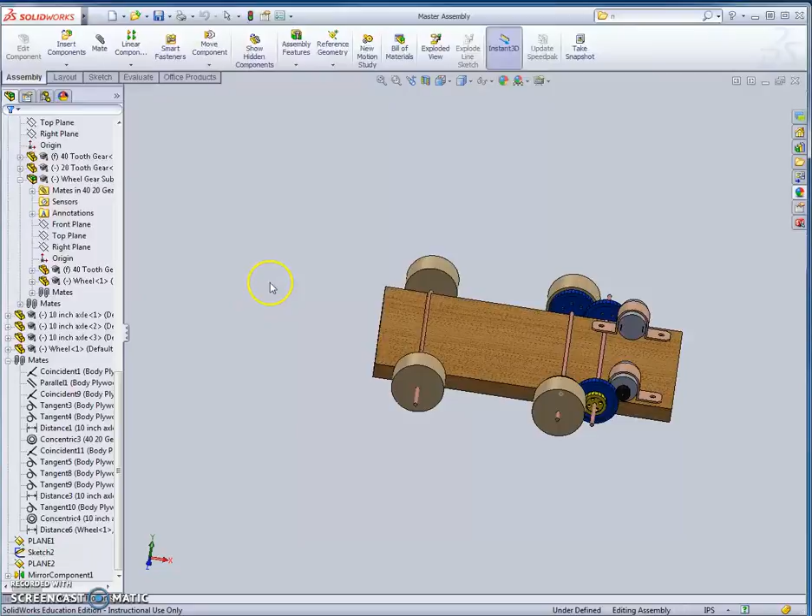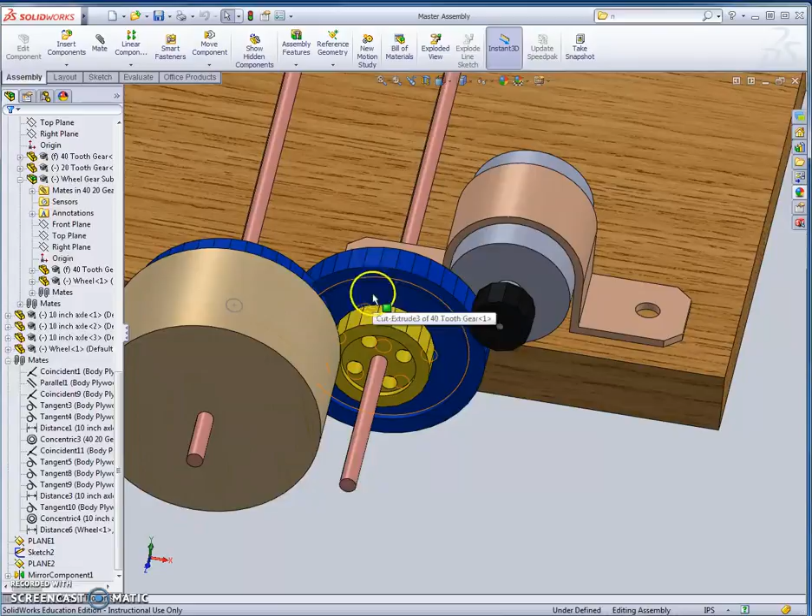Here's an example of a design using the materials I'm giving you for the SumoBot. This robot has 2 motors, one on each side. You can look at the drivetrain: this is a 12-tooth gear attached to a 40-tooth gear, and the 40-tooth gear and the 20-tooth gear are attached on the same axle, press fit for example. This 20-tooth gear is driving a 40-tooth gear, which is then attached to a wheel. So this would be driven on these 2 sides, and the other 2 wheels are just there to help the robot roll.

Here's some examples of how to create what are called sub-assemblies. The reason you would do a sub-assembly is that a lot of these parts will be easier to put together in smaller sections, and then you can insert them into what's called your master assembly.

We're going to start off with the motor mount, the motor, and this 12-tooth gear, the smallest gear you're given. So instead of creating a new part, we're going to be creating a new assembly.

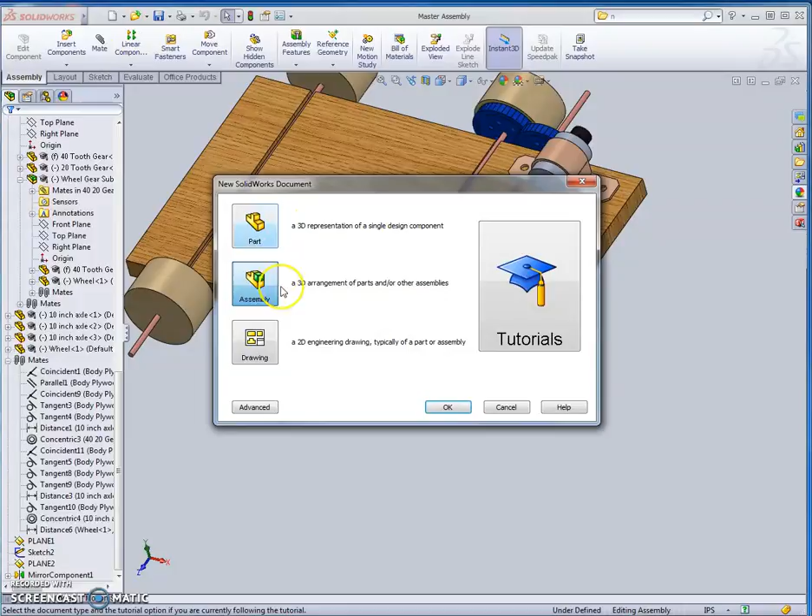We have to find some of the components we're going to be inserting. A quick note here: this doesn't matter so much for this assembly, but whatever part you insert first is going to be fixed in space. It will not be able to move, and the other parts will need to move around it. So in the case of the motor mount and the motor, I'm going to consider the motor mount itself as the fixed object, so I'm going to find the motor mount.

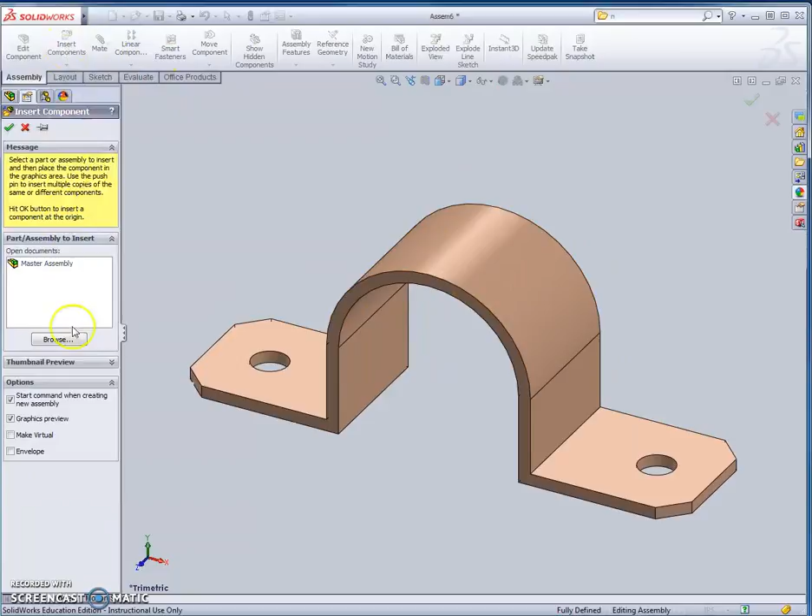The motor bracket, it's called. There we go. I'm going to place that in space. I'm also going to insert the motor itself—SumoBot motor, there we go. And I'm going to insert the gear, the small gear, a little bit later.

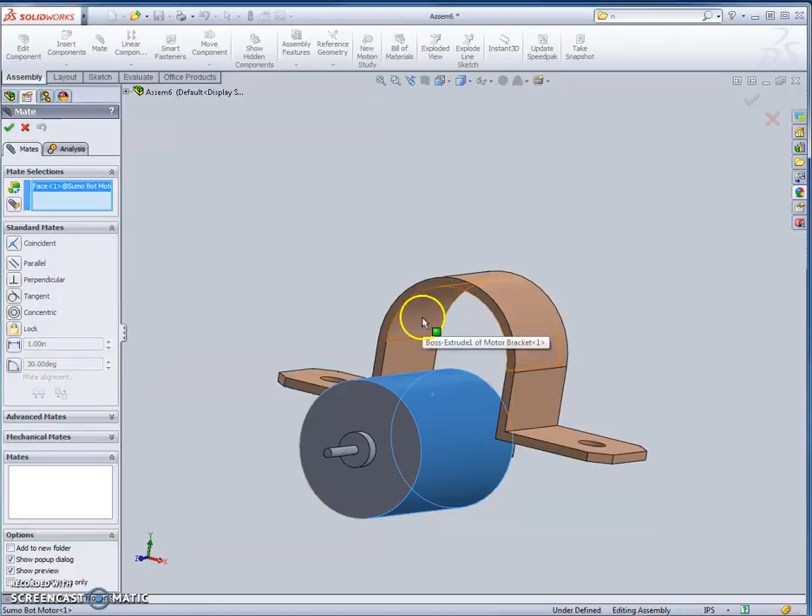First, to mate these things, it looks like the cylinder of this motor should fit snugly in the cylinder right here. So if I select that outside cylinder and this cylinder, you'll see they mate together. Click the check mark. Now those things are mated, so the cylinders will be touching, but it still has the freedom to move back and forth and also to rotate. In this case, I don't care exactly where it is—I could come back and change that later if I want.

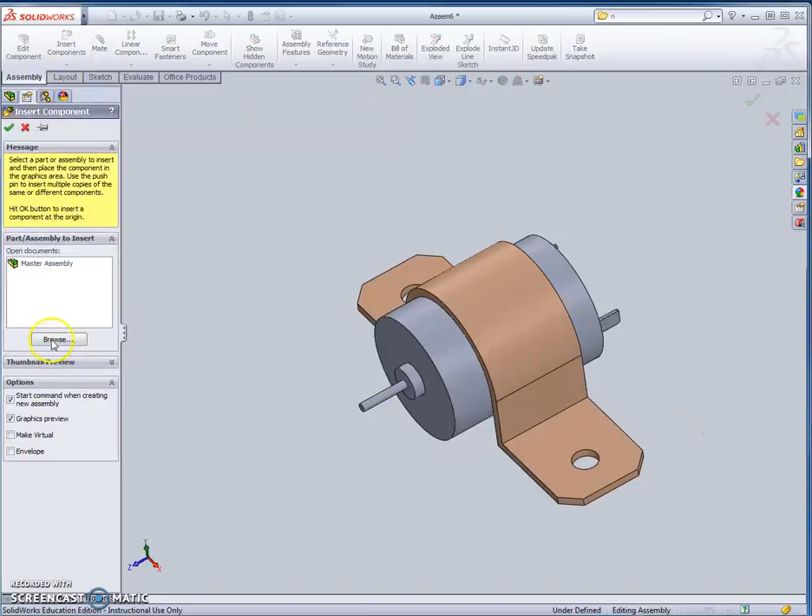Next I'm also going to insert the gear. This is called the 12-tooth gear with a small hole for motor. Insert, and place it somewhere in space.

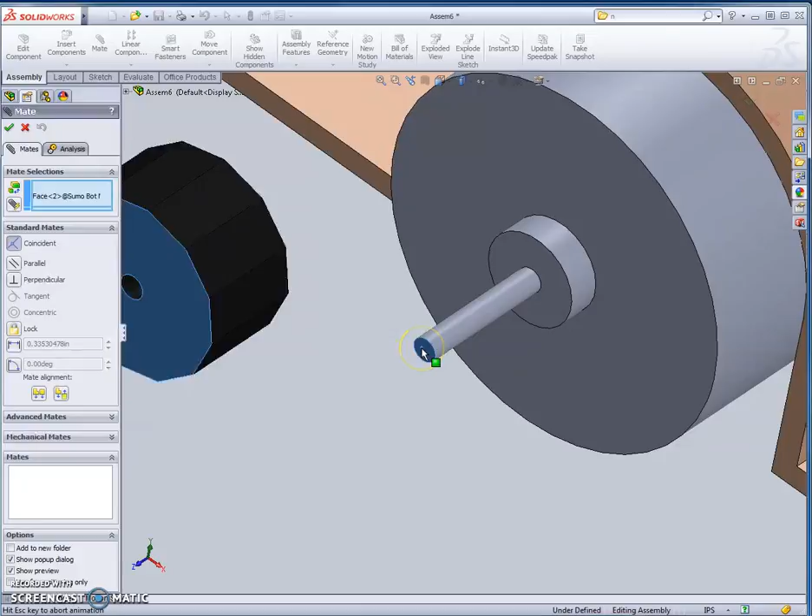There's a couple things I want to mate here. I'm going to mate this plane, or that face I should say, and this face—I'm not clicking on the edge, I'm clicking on the face itself. When I do that, it makes them coincident to each other. So right now it says coincident, these faces are coincident. Actually, I want them coincident, not parallel. If they're parallel, they could actually be anywhere lined up. Coincident means they will be in the same plane.

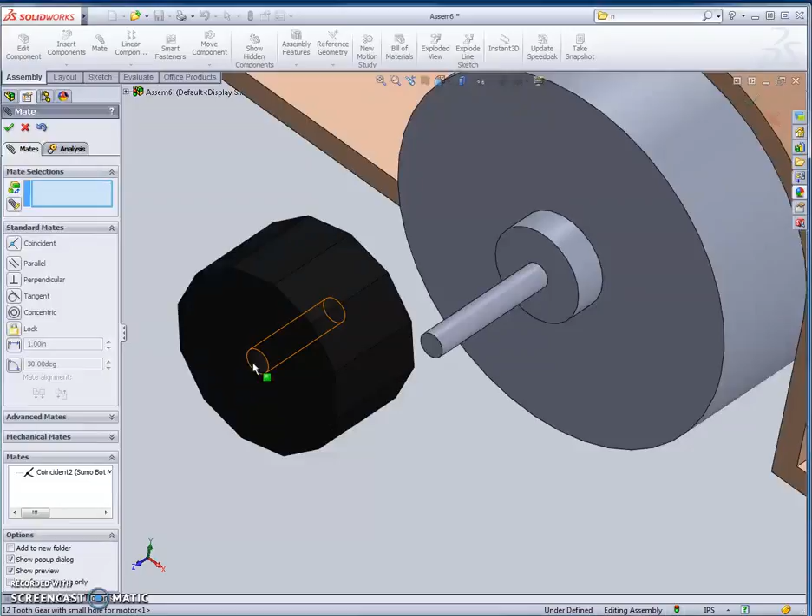Check mark. So the last thing I'm going to do is make them concentric. I'll find the inside cylinder of that, click on it, outside cylinder of this, click on it, and then those things are now going to be lined up. Again, this motor can still move around, but the gear itself is attached to that motor. That's going to be good for that.

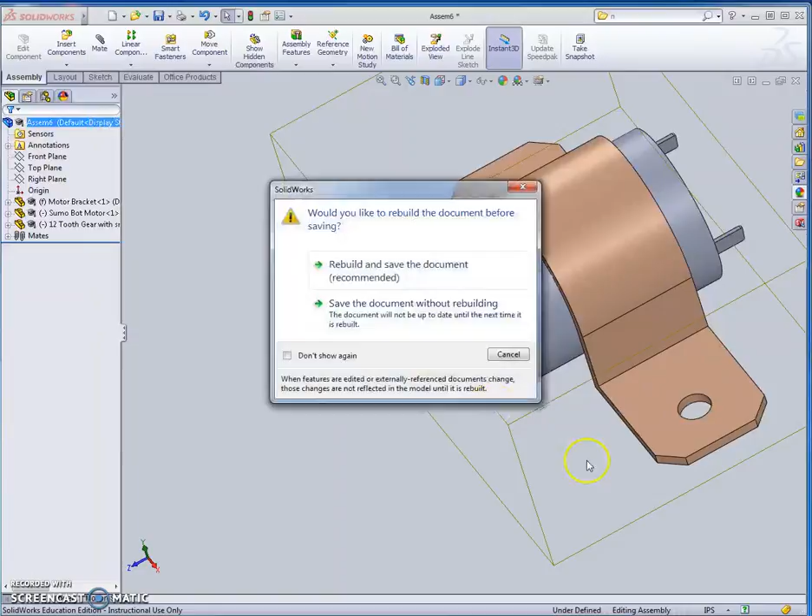All right, I'm done with my mates. I'm going to save this—I'll save as, and this is an example of what's called a sub-assembly. Let's go ahead and rebuild. That's fine. I'm going to call it motor and motor mount sub-assembly. Since I've already titled one of these, I'm going to call it sub-assembly 2.

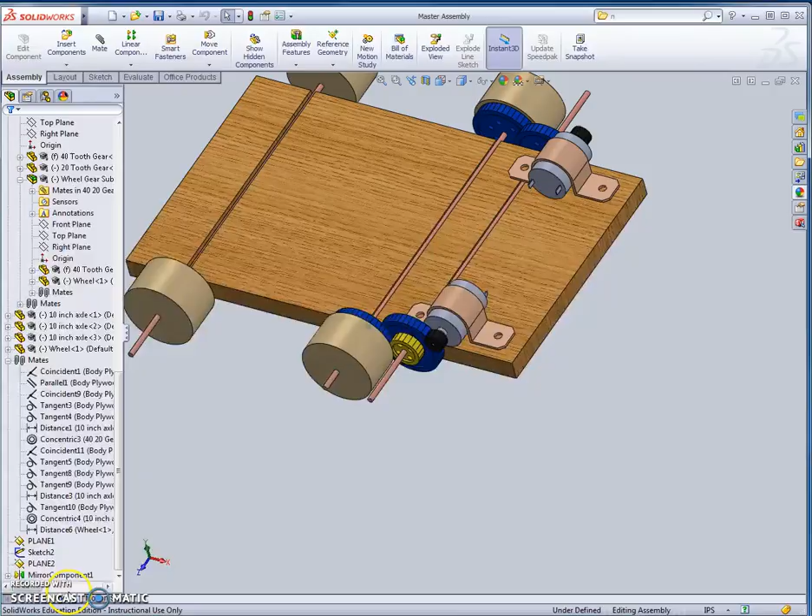Okay, I'm going to minimize that. All right, next let's go back to our original drawing. This would be something I've already drawn out on paper, and I've gone through the process of doing CAD just so I knew what steps I'd be going through. But you would be going back to a drawing on paper.

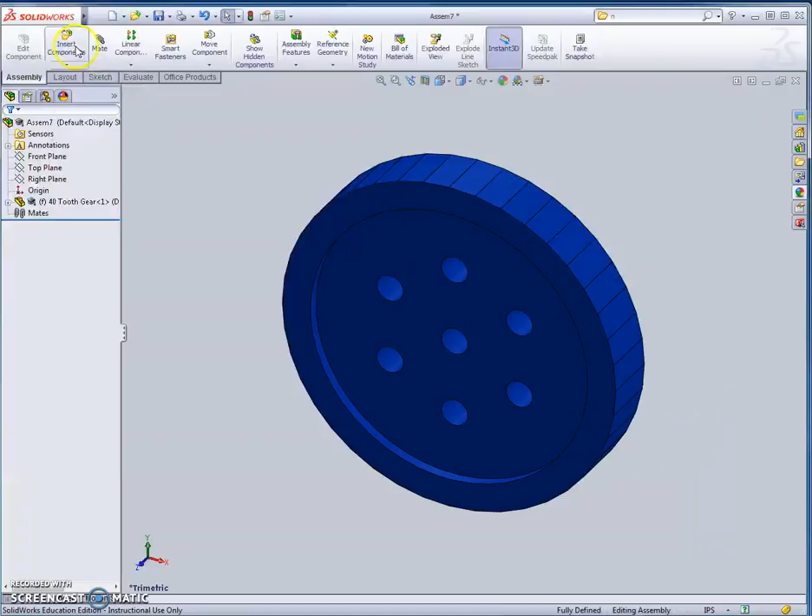The next thing I'm going to be putting together are these two gears, the 40-tooth and the 20-tooth gear. So I'm going to create a new sub-assembly, browse and find that 40-tooth gear, place that. I'm also going to browse and find the 20-tooth gear. Place that. Okay, so we have a few things.

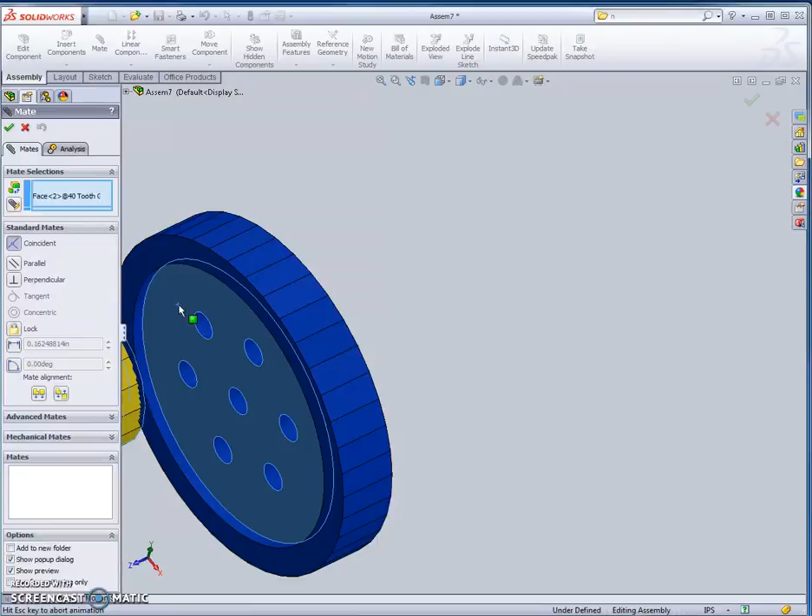This will be very similar to what we did before. I'm going to mate first the two planes. So this plane, and you can see how there's kind of an inset in this gear, that plane is going to be up against the blue plane. Check mark. And then I'm also going to make these two holes concentric, so I click on the inside cylinder of both, check mark, and we're done.

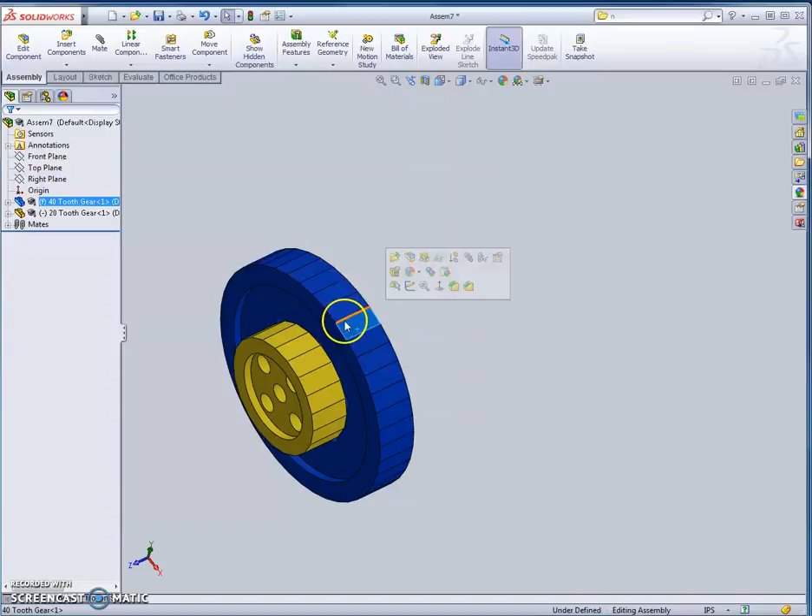So this 40-tooth gear, since it's the first thing I put in, that can't rotate or move. This one could still rotate. I'm going to file save as, and call it a 40-20 gear sub-assembly. And again, since I've done this already, I'm going to call it assembly number 2.

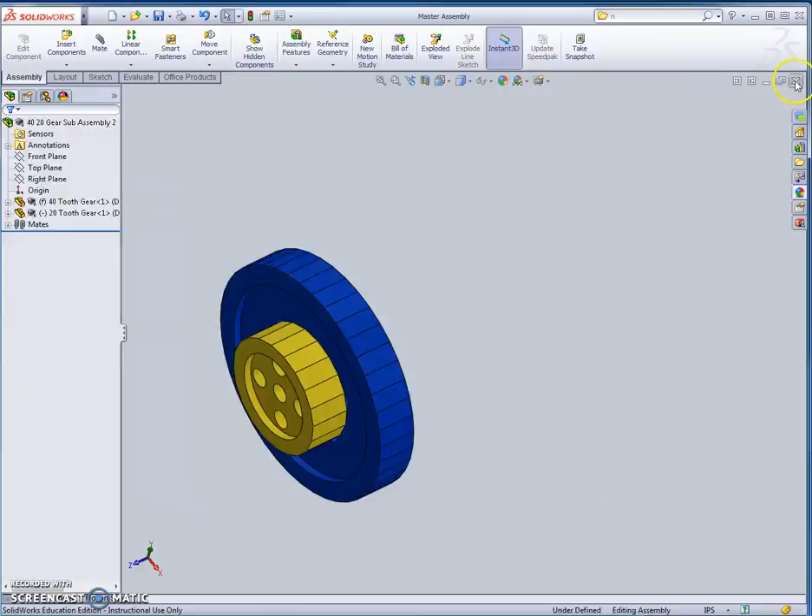Okay, next, I'm going to do the 40-tooth gear and the wheel itself. So, file new, assembly, browse.

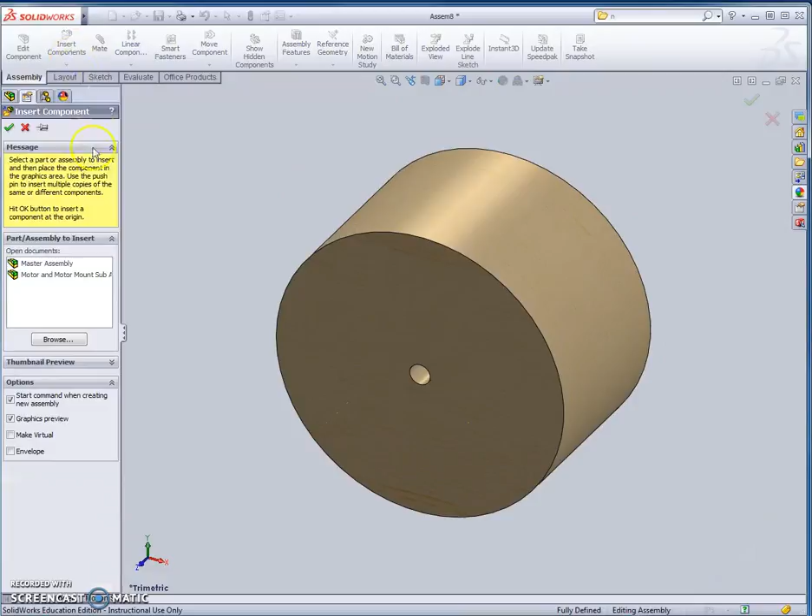Okay, what do I need? I need the wheel. There we go. Insert. I also need to insert components, the 40-tooth gear. Place it there. This will be very similar.

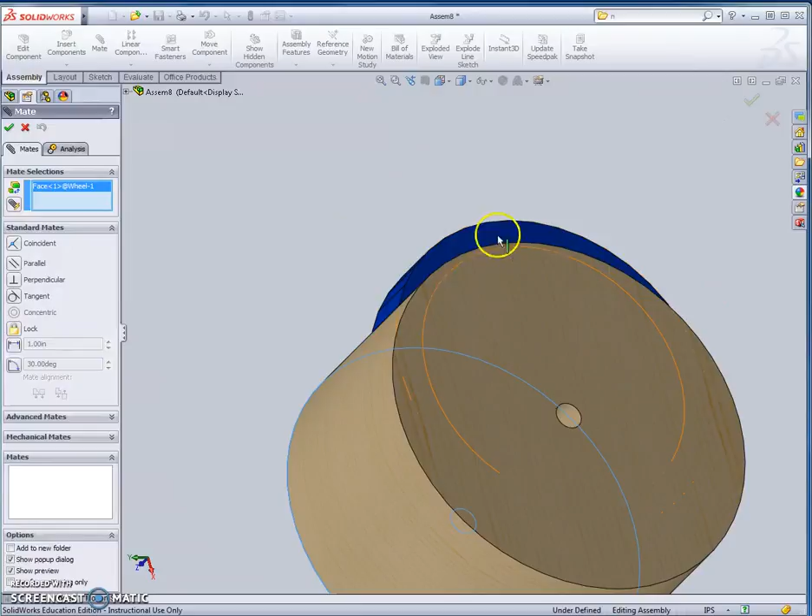I'm going to, sorry about that, I don't need to insert. I'm going to mate this face and this face. I'm using this scroll bar on the mouse to move around, so these things are lined up. Now I'm going to select the two cylinders, make them concentric. There you go, that is attached to the wheel.

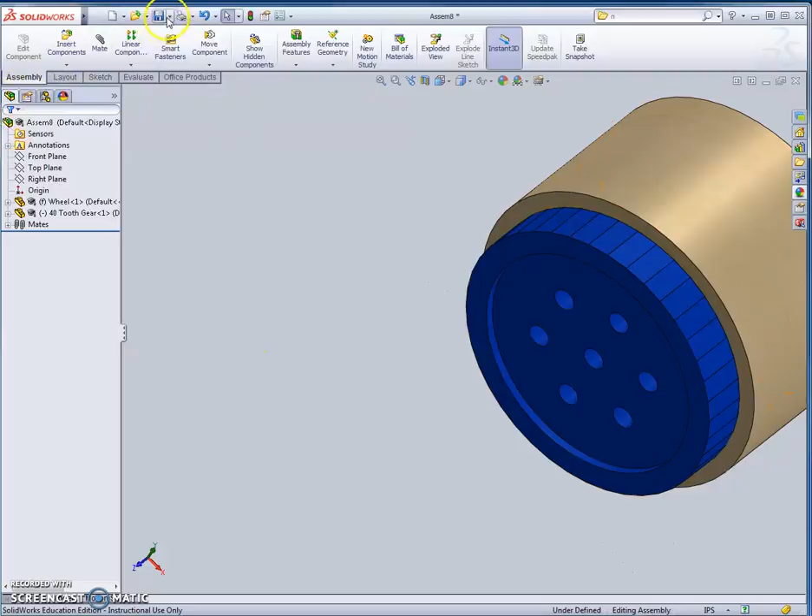Okay, I'm going to call this the wheel gear sub-assembly 2 again. Okay, now going back to our master assembly, I'm kind of splitting this up into smaller parts. We've done this, we've done this, we've done this.

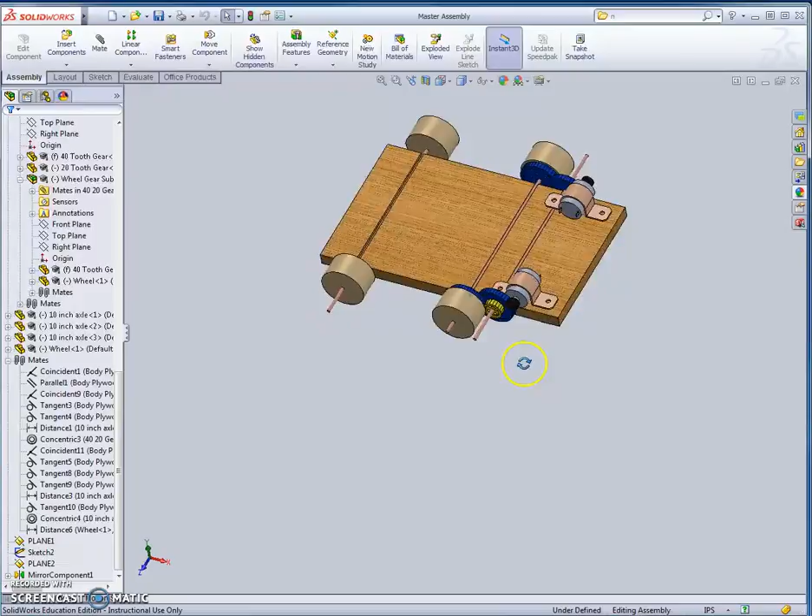Next, let's actually assemble all 3 of these things together. Sorry, let me try that over. Let's actually assemble the 40 and 20-tooth gear combination, and the 40-tooth and the wheel combination together in its own assembly. So new, assembly, and let's see, what do I want?

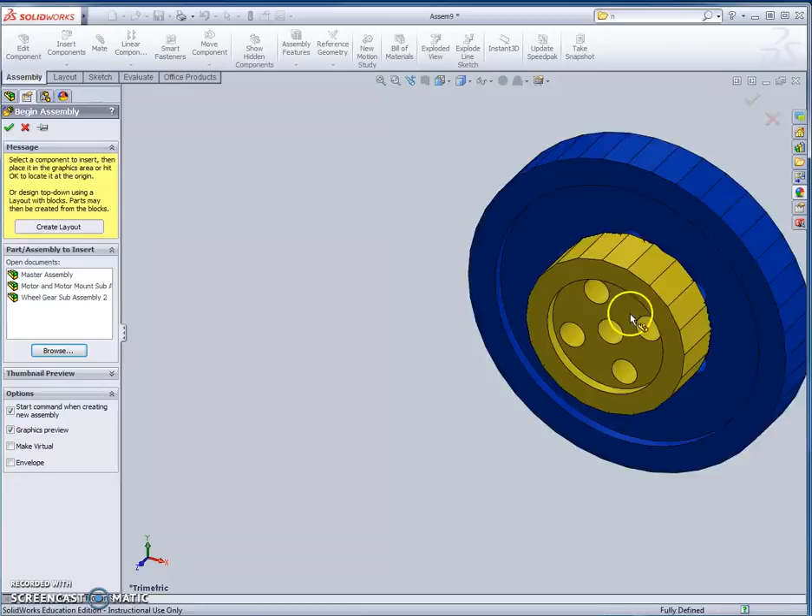I want the 40 and 20 gear combination. There it is, place that somewhere in space. And I also want to insert the wheel and gear sub-assembly. That is coming up because I didn't close that file. There we go. Okay, so now let's talk about how to mate these things.

First of all, let's look at the gears. This is not actually what your gears look like. If I were to zoom in on this, the gear itself has teeth that come up and go in. The lines that I drew here show the midpoint of the teeth, basically.

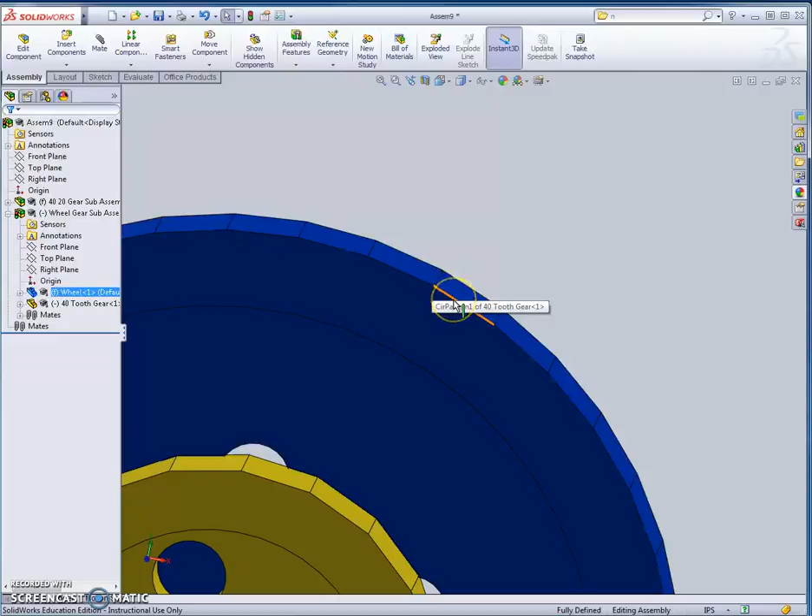In order for example, this yellow and this blue to line up right, you just need to make this edge touch or be coincident to that edge. And in real life, the teeth of the gear go below and above that line, and they will mesh correctly if you get those distances right. Okay, so let's do this. We are going to mate.

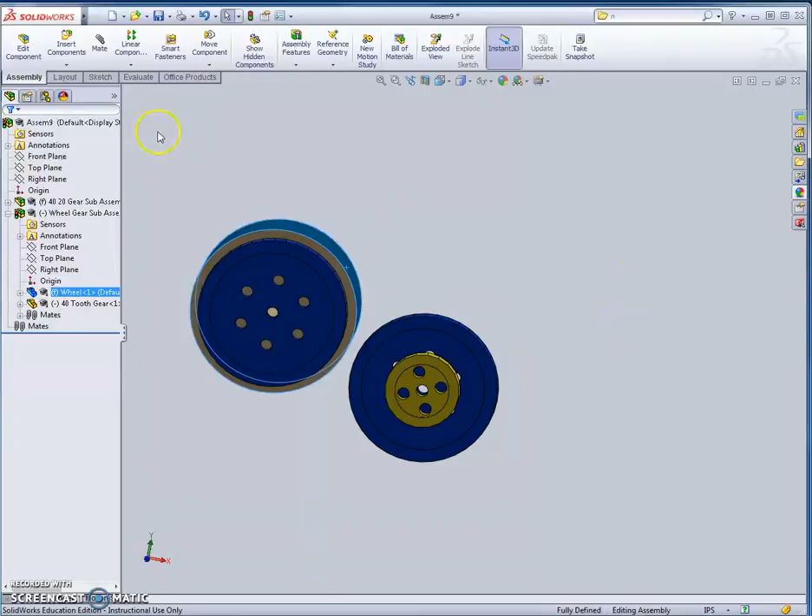First, let's mate the planes of these two things. I'm going to mate this and this, I want them lined up. But since I want the 40 tooth here and the 20 tooth here to actually touch, I need to flip that wheel.

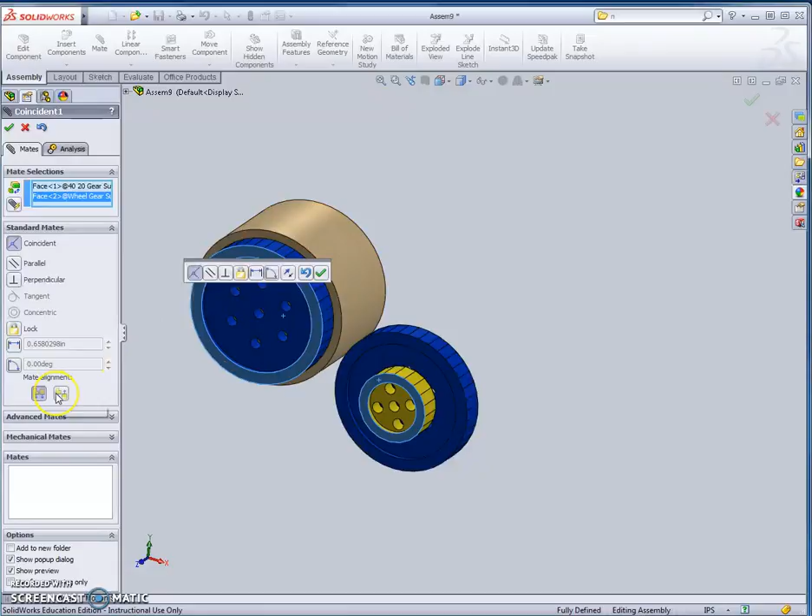Here's how to do that. There's a button that says flip mate alignment. It's also right here, says mate alignment, anti-aligned. If I hit either of those buttons, it flips it around so those two planes are still lined up, but with this being flipped. I can click it again and it unflips it.

You can see how in both cases those two planes or faces are lined up. This is what I want it to look like, so I'm going to click the check mark.

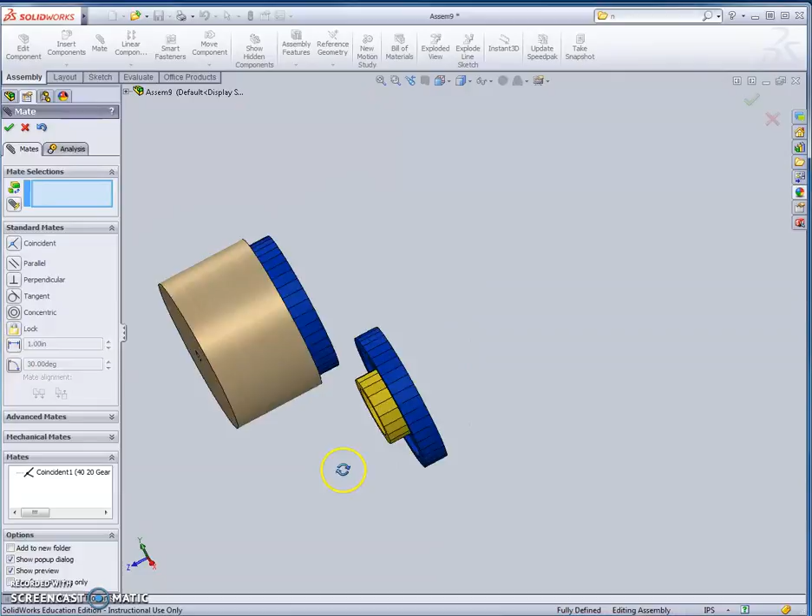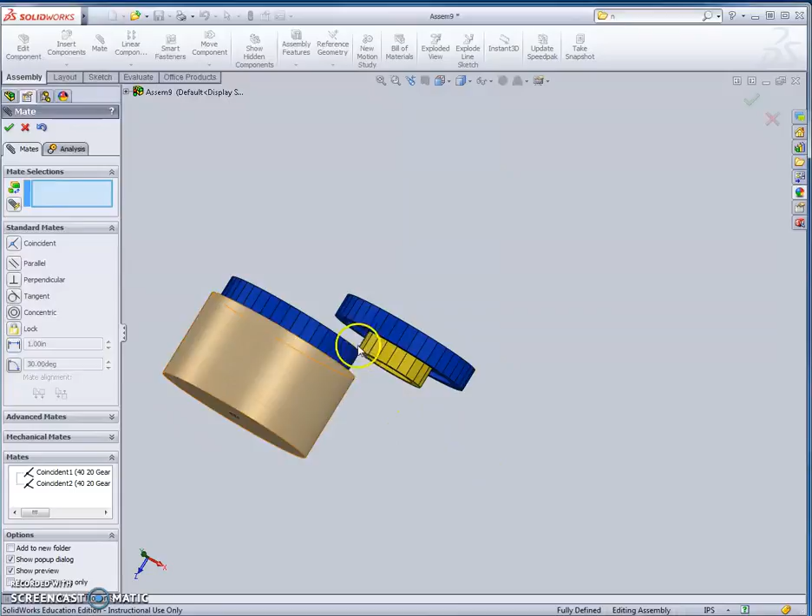Next I want to make it so that this gear is physically touching that gear. It doesn't matter which edge, but I'll click on one of these edges and one of these edges, then make them coincident so they're touching. I'm noticing here I actually got the wrong edges lined up, so we'll come back and fix that in a minute.

Now, zooming in real closely here, that edge and this edge are the two that I have lined up.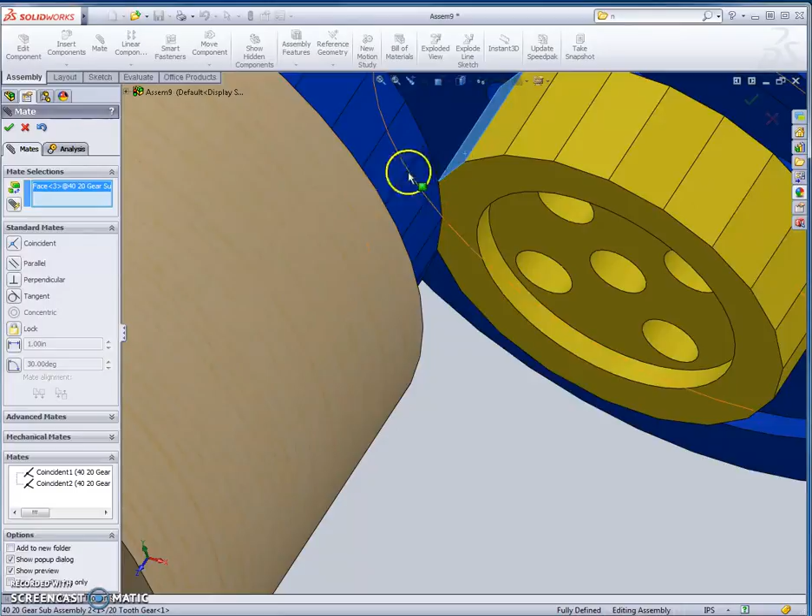The next thing I want to do is make this face parallel to that, the face it should be touching, which would be that face. So I'm going to select this face and this face — they are coincident to each other. Now those gears are really lined up. Okay, check mark, I'm done with my mates.

Now, as I mentioned, I made a mistake with which faces I mated here, so I'm going to go back. If I click plus on the Feature Manager design tree by the mates, I can see the mates I did in order. The first mate, the one I want to change, is this one. I'll click on it and click Edit Feature — actually, I'm just going to right-click and delete it and try again.

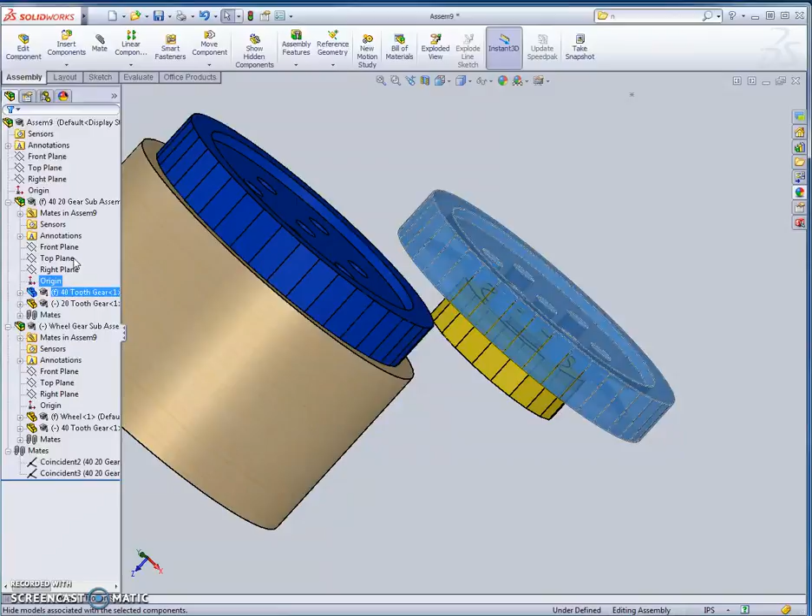Part of the reason it made this hard to line up is that this gear is actually in the way, and there's a way for me to get rid of that. If I go up and find that 40-tooth gear, I can click on the part symbol or icon and make it hide the component. It'll look like it goes away. Now I can go back and do the mate that I wanted to do.

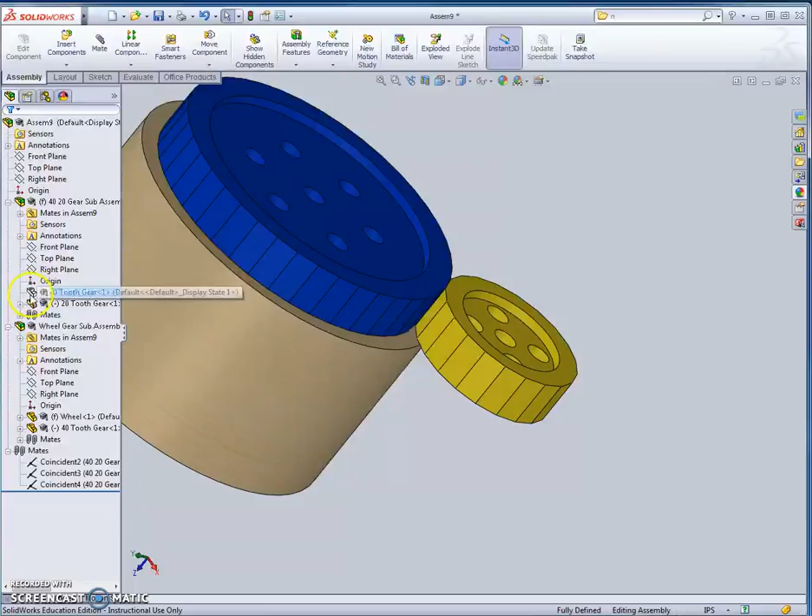Mate — those two faces are the ones I actually wanted lined up. Check mark, all done with that. Then I can go back to that 40-tooth gear, click on that icon — see how it looks transparent now, just the lines. I can go Show Component, and there it is, it comes right back. Okay.

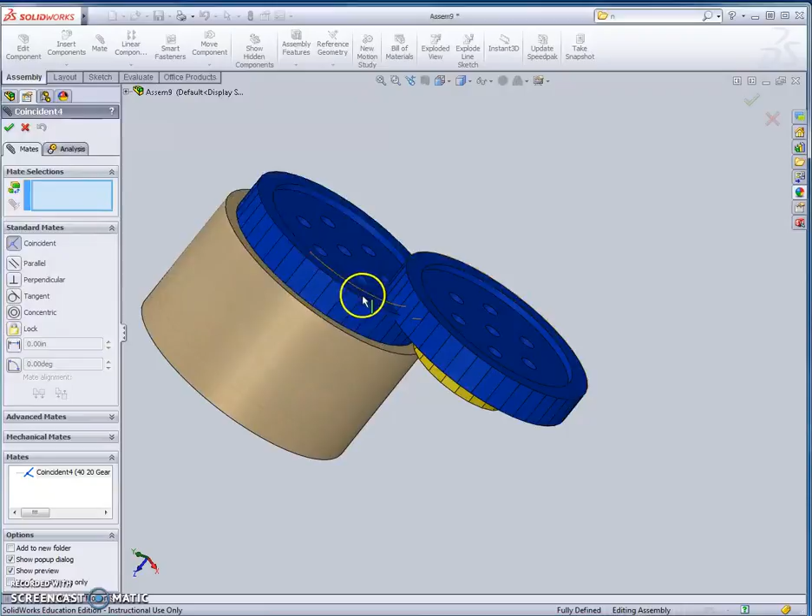You'll notice, actually, I've got an issue here with the way these two things are lined up. I'm going to leave that as is right now, but if I wanted to fix that, maybe I should. I'm going to go back to this mate — this is the last mate we did. Looks like I actually don't want the yellow face to be lined up, but I actually want this face and that face to be lined up.

Flip. Check mark. Done. Okay, so that is looking good.

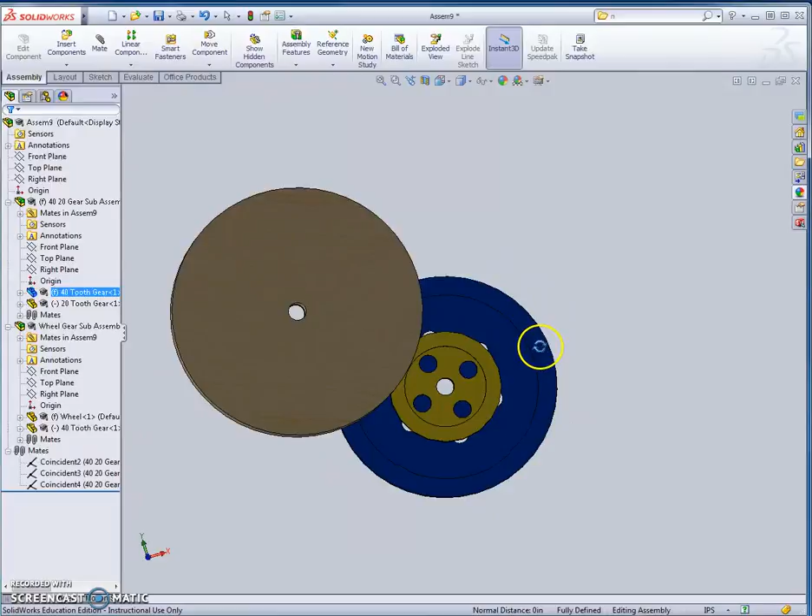All right, we are almost done with this. We're going to go File, Save As — this is also a sub-assembly, so I'm going to call it Gear Train Sub-Assembly. Also going to name it 2. Okay.